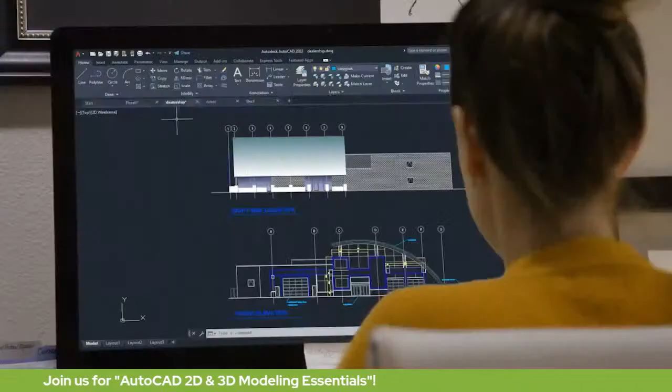Welcome to AutoCAD 2022. AutoCAD is a CAD leader with best-in-class 2D drafting and 3D design, trusted by millions of designers and drafters. AutoCAD 2022 is leading the next generation of design by tapping into intelligent automation technology to empower designers like never before.

By automating time-consuming tasks, enabling users to focus on the most valuable design work. By including features like Count that eliminate manual counting and errors, or Trace, a feature that streamlines collaboration and reviews without altering the existing drawing.

And to accomplish industry tasks faster and with more precision, AutoCAD's industry-specific toolsets could help users realize impressive productivity gains averaging 63%.

And because Autodesk products are made to work together, projects designed in AutoCAD work seamlessly across tools and teams. Leverage the power of AutoCAD, no matter the place or platform: Mac, PC, laptop, mobile, and cloud.

In the office or in your home, the included web and mobile apps in AutoCAD 2022 let you work wherever, whenever, or on whatever device you want, using the cloud storage platform that you prefer.

From the job site to your backyard, keep your projects on track while away from the office with the AutoCAD mobile app. Design, edit, and access your DWGs right on your mobile device.

And for essential CAD drafting tools from any computer, there's the AutoCAD web app. Simply log in and get to work in a web browser, connecting to your DWG files in Autodesk Drive, Autodesk Docs, and third-party cloud storage providers, drafting with the same precision and fidelity you've come to expect.

The 2022 AutoCAD connected experience across desktop, web, and mobile also features Share, which delivers peace of mind by providing control over who can access and edit your files. AutoCAD: the tools you desire, the innovation you deserve.

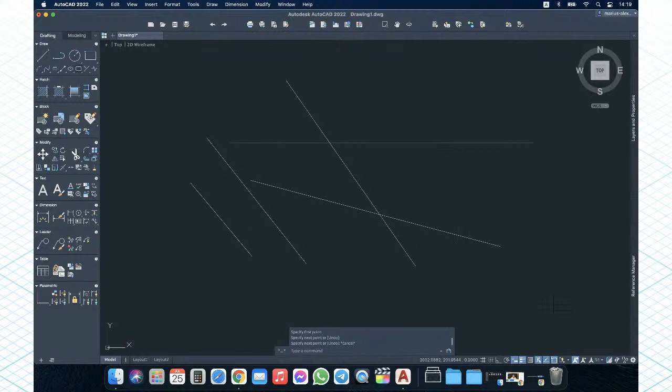Now I've shown you how to draw a line. It's very simple and fun. Another way to draw a precise line is, for example, if I want to draw a line at a 45 degree angle with a length of 100 units.

But before doing that, I want to say that before every single drawing, the units are very important. To manage the units, you need to write 'units' and press enter, since it's another command. A window full of options will appear. For those without a macOS, don't be scared, because I usually just use written commands, so you don't need the taskbar—just write the commands and everything will be fine. This window will be similar to the Windows version, with a window full of options.

Here you have the type—I will personally select decimal. You can also select scientific, engineering, or architectural, depending on your domain of activity. For precision, I can leave it at 4 decimals, but I usually work with 2. It's also fine to use 1 or more if you work in kilometers, for example, but I'll leave it at 2 decimals for today. For light intensity units, I'm from Europe, and I believe most of the world uses the metric system, so I'll set it to international instead of inches.

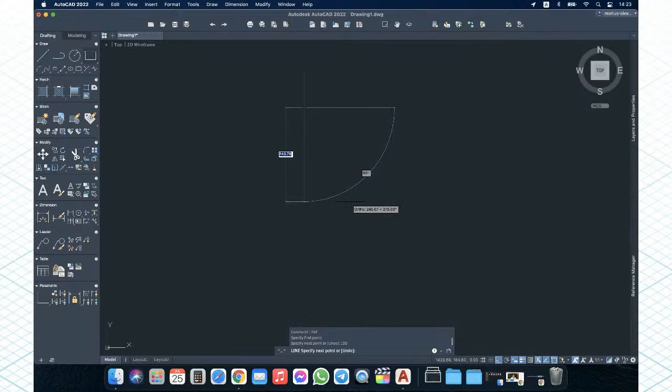Let's go on, for example I want to draw a rectangle. Instead of doing 4 lines with the line command, I want straight lines, as I said before, so I'll use the ortho command, or I can write ortho with the keyboard. Let's say a line of 100, enter, and the command is still active. 100 again, 100 again, and I came back to the starting point.

But as you see here, I have a little endpoint here. So in order to deal with that, I will click on it and then press escape, or I can right click. But you see that I had there a little green square.

For that, I can go to the settings, another important command with a bunch of options. Depending on what I need to do, I have more options here. In my case I needed endpoint. If I uncheck it, I cannot see it anymore. Usually you don't need to work with all of them, but if you're a complex user, you will basically need all of them. So you have endpoint, midpoint, center, geometric center, node, quadrant, intersection. In the following drawings I will show you how to apply around 6 or 8 of them. So I will press OK.

Now let's say here I have 4 lines, you see there are 4 objects. But look, for example, I selected one object and I'll go to the panel, or I can press Control 1, this combination of keys. It says here, line, properties. So line is one object. If I select 2, there will be 2 lines.

But if I want to have just one single object, I need a polyline. Let's combine them, use 2 lines for example, and apply the join command to have one single object. This way we gain some time if you need to copy this part. So let's say I want to construct one single object through all 4 lines. I select all 4 and press the join command. Now instead of 4 lines, I have one single line, which is also called a polyline.

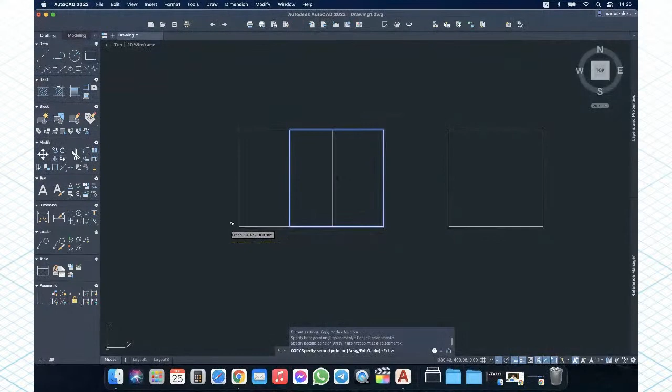Now I want to copy it, for example. Let's use the copy command. It's already selected, copy, select the center point or a reference point, and you can copy it. It doesn't matter where it is or how long it is.

In order to move them, for example, I want to move them, select all of them, write the move command, and move them where you need.

Good, for the next step, here I have the draw tab. Now I have the hatch. For example, I need to use the hatch of earth. I can click on it or write hatch. As I said before, every command you can also write instead of just clicking on it. You will gain much time this way.

For example, I want to choose another one. So I open the library and I will write here earth.

I will click on it and voila, I have now the earth here. It's very simple, it is very usual.

Okay, so now another interesting fact, and then I'll move on to the drawings. Let's say I want to move this one in a lot of places. So, I selected, I copied, I pick a reference point, let's deactivate the ortho command, and I place it here and here.

Okay, let's say I want to have a little modify. So I pick up the hatch, move command, and I will move it. I'm not happy because I want to have the same feature also on the other side. In order to do that, I will go to undo, or press Control Z key.

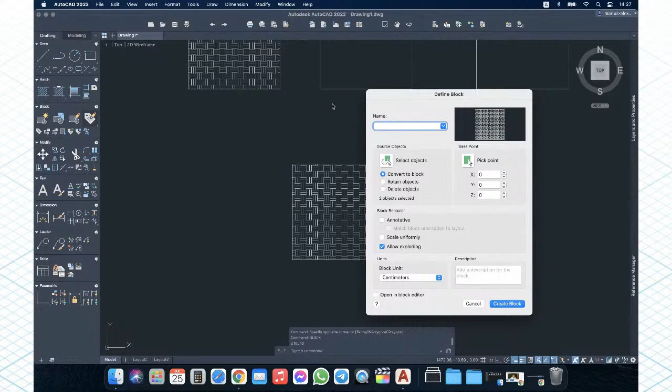I will select it and make an intelligent block. So I selected, I press block, press enter, and now another window will appear. For example, let's write here the block name, Earth. Then select objects. I select not just the hatch, but also this polyline, and press enter. Now I will create the block. And the beauty of this part is that you gain a tremendous amount of time.

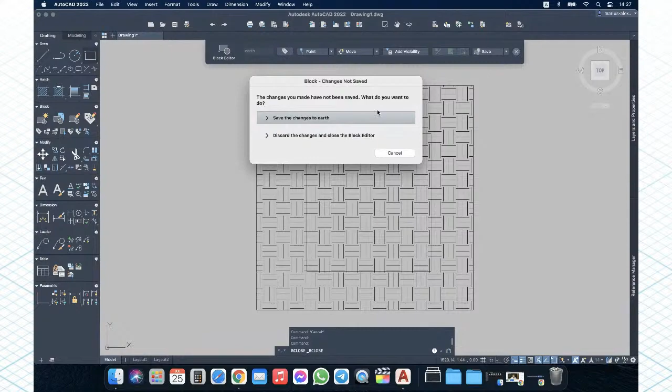For example, I select this part, I copy it, and now I put it wherever I want. And the beauty, as I said, let's say I want to have a little modify. So I press on it, and now I can go here and make a modify, for example, to add another rectangle. So you can press here or write rectangle, and I will create a rectangle over it. Now I close it, save the changes, yes, and this is the beauty that I was talking about.

So here I have the same drawing, but updated in every single one. So it is much more efficient, and I don't lose a lot of time this way. And here I have also other options.

For example, dimension. I want to measure something. I can go here to dimension, and I can select to dimension something. And you see, I have 100, as I said before.

But enough with this presentation, enough with this talking. Let's start to do something productive, to work and to draw something. I am prepared for you today with 3 drawings in 2D.

So here I have. Let's start with the first one because it is very simple and very common. So let's go back. In order to do this, I will open a new tab here, a new template. I will create the ortho mode already, and I will change into grid display to have a better view.

Good, let's have a look again at our drawing. So we will start now with these 2 circles because you know now how to construct them. We have 2 circles, one with a diameter of 80 and another one with a diameter of 40 units. So let's write circle, and now we'll write 0,0 because it is a very important remark to start from the origin, from the XY axis. Enter, and we will write D for diameter, 80 units.

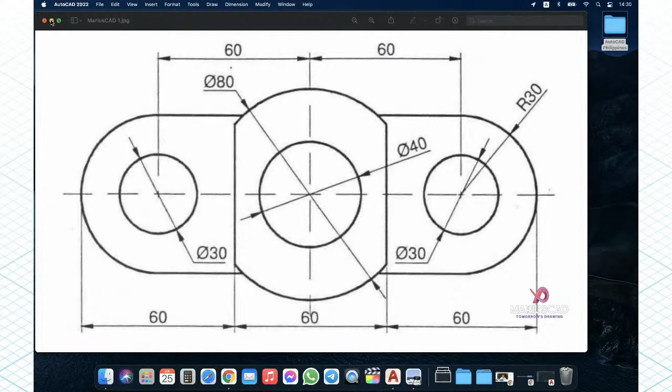So write the line command. Starting from the origin, you can click here because it automatically detects the center point, or write again 0,0. My advice for you, especially for all beginners, is to help yourself as much as you can from the origin, because it will help and gain a lot of time and energy. So trust me. We have the line now, and we will write 60 units, press enter, and then escape to finish the command, because the command is still active.

Now, from this end point, our duty is to work and draw these two circles.

So a circle with a diameter of 30 units and a circle with a radius of 30 units. Let's go back. Let's write circle, starting from this point, not from the origin this time, and write just 30, because this one will be with a radius of 30. Now, when it comes to diameter, write circle again, starting from this point, and press D for diameter, 30 units.

Okay, now it is enough with this part. Let's add these two lines, in order to construct this line from this point, because it is a specific point, exactly a quadrant of the exterior circle, and we will prolong it until it reaches this distance.

So let's delete this part, delete this line, and write line again. Starting from this quadrant, you see this green quadrant here, and make it longer. It doesn't matter how long it is.

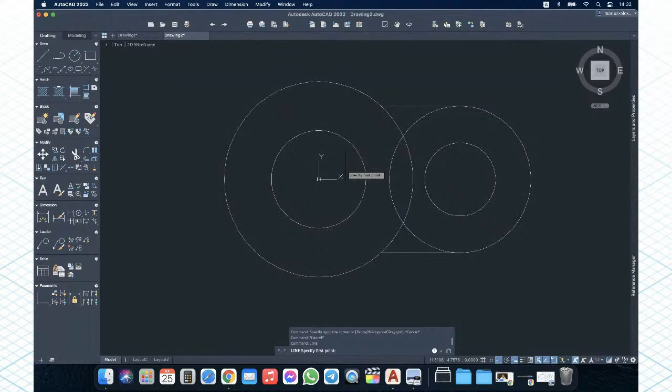So we will write a line. We will start from the origin, so 0,0, and we will make a line. It doesn't matter how long it is, but we will extend it. For this, use the extend command and select this surface, or this one.

But in our case, you can also copy this one, copy command, and place it exactly here. And as I showed you before, to have one single line, select this one, select the other one, and press the join command to have one single line.

As you see, we have 3 points here, not 6 or 5. Good. Now the line is already selected.

Apply the offset command. The offset command is a command for parallel lines. Offset it, now write 30 units, because this is the distance, and select each side you want to have. I want to have it on the right side.

Okay, escape. And now it is time to trim. But in order to do that, let's delete all the extra parts. So delete this line, we don't need it anymore. And here we need to have this line, you see it, until here.

So keep it in mind, select the entire drawing, Control A, trim, because it is way faster. Also this little part, this tiny part. Okay, the same thing in the other direction.

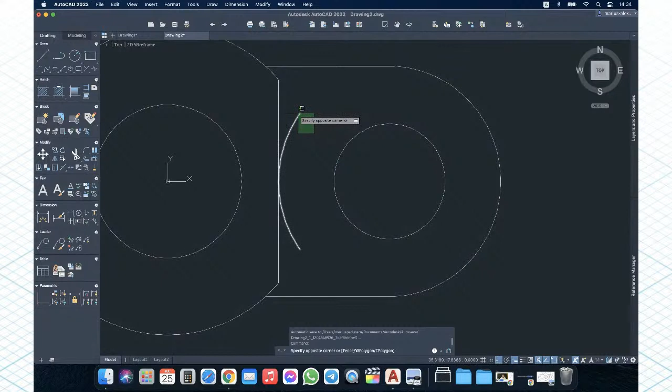Good, let's delete these arcs. Boom, okay, escape, select this arc and delete it.

Now our drawing is half done, but we are very clever people, so let's do another command, the mirror command, because it is basically a mirror. So copy this part that you want to mirror, enter, and read every time what is written right here: specify first point of mirroring line.

So we need to draw now the mirroring line. In order to do that, let's select, for example, this point, it doesn't matter which point. Be sure you have the ortho command active, because I will show you right now to have an idea. So if I don't have this command active, you see it is not a perfect mirror.

So in order to do that, I will press at the point, it doesn't matter where, and I will be asked 'erase source object', and I will press no, because otherwise if I press yes, this part will be automatically deleted and I still need it.

Select the entire drawing now again, press the trim command because it's faster to select the entire one, and delete this part. And voila, our drawing is now complete. You can see it is the same drawing.

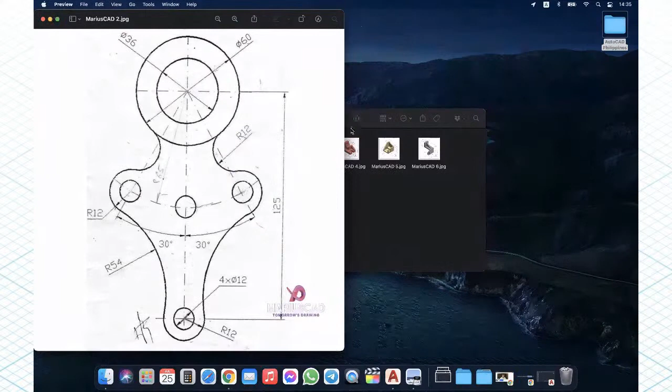Good, I hope this example was clear. Let's begin and go furthermore. We have another one prepared here for the 2D part, so I will make it full screen. Okay, so look at it.

Now we will start with this drawing with these two circles again. So in every part, just focus on the biggest side because it is the most important and it is much faster to do it.

So select this part, go to this circle. We have here a circle with a diameter of 36 units and a circle with a diameter of 60 units. Let's not change the template, we have enough space here.

So let's move the origin instead, because this could be very helpful. Go to the origin, I will zoom in a little and select move origin only. We will move it to the other side of the 3D parts. Please be patient. So, a circle with a diameter of 36 and 60 units, keep it in mind.

But in our case, there are centimeters. So circle 0,0 to start from the origin, then diameter 36. Now circle again, 0,0 to start from the origin again, then diameter 60. Let's have a look again - 60, 36, okay, everything is perfect.

Now let's draw another line. Here we have another line of 125 units in order to reach this point and these two circles. So a circle with a diameter of 12 and a radius of 12. Let's do that.

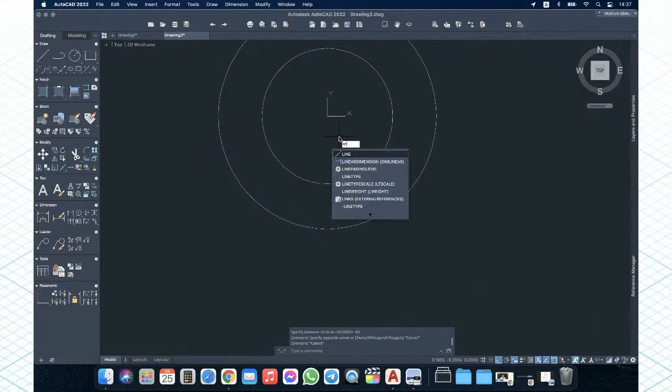Let's zoom in. I'll write line 0,0 to start from the origin, as I said, 125 units. Press escape. From this point, the magic will happen again - circle, starting from this point, write 12.

This one will be the big one, the circle with a radius of 12. Circle again from the same point, diameter 12 again. So now we have these two circles.

Now let's construct the biggest circle in this drawing. You see here that we have a radius of 54 units in order to reach these 3 little circles. We will start from the same center as the other two circles. So keep it in mind, a radius of 54, a pretty big circle actually for our drawing.

So circle, we can start from the origin, 0,0, and now we will write 54 units because we need the radius, not the diameter. Here it will be our first one, but you have to pay attention, I suppose. Here we have 4 circles with a diameter of 12, here, here, and here, and on this side we also have the circle of 12.

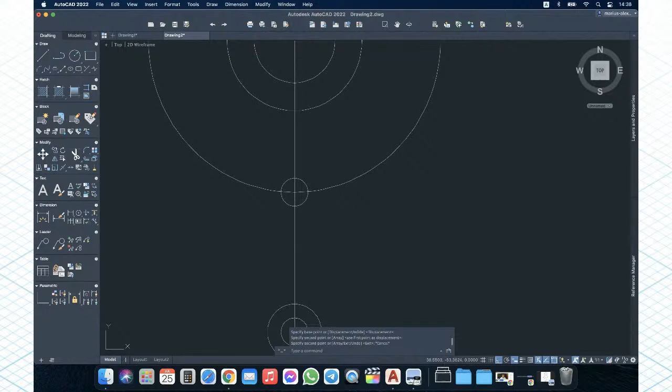So let's copy it, let's be a little more intelligent and copy it. Select this one, copy it. Go here from this point, because this will be the base point. And in order to know where this circle is, let's be a little bit funnier.

So let's go here, and now you see that we have an angle of 30 degrees. In order to reach this angle, we must construct another line, a line with a radius of 30, in order to reach this circle too.

So we will go here to this point, we will write a line again, and let's deactivate the ortho command. We will go here, and as you see, I am free to do a line, but pay attention to me and apply the Alt key. So press Shift and Alt key, and now I have more options.

So now I will press the length. The length, let's say it will be 100, it doesn't matter too much. 100, then press the Tab key, and you see now the 100 length is blocked, so it doesn't matter how long I want it to be because it is blocked on 100. Now the only thing that depends is the angle.

And let's be clever here. So this is 270 degrees. I need to add an additional 30 degrees angle, and 270 degrees plus 30 degrees, that means 300. So we will write 300 degrees and press enter.

Press escape, and here at this intersection point, we need to copy the circles. So copy these two circles, copy it. This center will be the reference point, and we will place it like this at this intersection. Now select this line, select this circle, and delete them because we don't need them anymore.

Let's have a look again at our drawing. So here we need to have a radius of 12 units, and here a radius of 54 units.

So fillet, because this is the command for the radius. Let's read: select first object, or polyline, radius, trim, multiple. In our case, it will be radius. We can write radius, or we can write just R. I will show you right away, but first of all I will write radius. Press enter, select the objects now, or specify fillet radius.

I will write here because it is needed, I will write 12 units. Let's go back, 12 units, enter. Okay, I have a little problem here, but it doesn't matter. Fillet, radius, 12, enter. And now select first object, this one it will be, select the second one, and this one it will be, and automatically I have the perfect radius that I need.

In the other side, I have here a radius of 54 units. You see it, let's apply it. Now you know properly how to do it. Fillet, radius, 54 units, select this circle and the next one. Good, everything now it's perfect. Okay, let's have a look again.

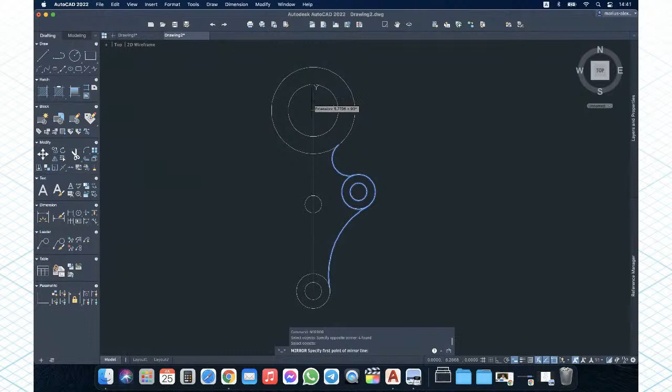We don't need it basically anymore, but let's do it on the other side, and you guessed it, we will use the mirror command. Mirror, select all the parts that you want to mirror. Enter mirroring line, we can start from the origin, from this endpoint, or from this center, it doesn't matter. Erase source objects, no. Okay, now delete this line, and select the entire drawing, use the trim command, and delete extra parts that you don't need.

Okay, let's have a final look, and here it is. Our drawing is again complete.

I hope all the explanations are clear, but for an extra step, I want to show you something that may help. So here I have an arch, here I have a circle or an arch again, here I have another circle, so I have more objects. Select the entire thing and write the join command, and now you see I have one single boundary here. It's very important, but it is very easy. Good, this drawing is done.

Let's move to the other one, the third and last 2D drawing for today. It looks nice, but we can handle it very easily. This one is a little bit harder, but I will show you some other commands, and I will show you how easy it is after that.

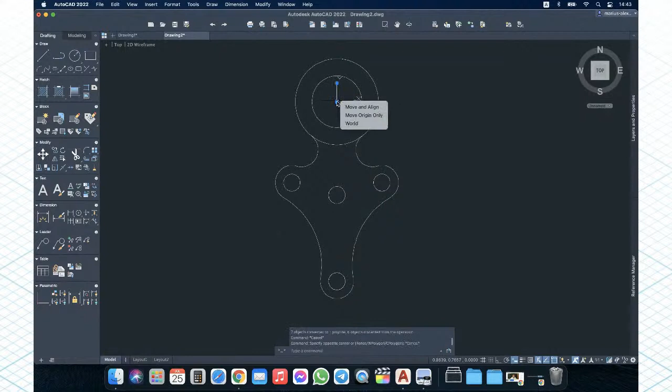So let's move the origin again now. Move origin only. Activate the ortho command if you want, it doesn't matter in our case. Okay, and now we are ready to go.

So this object, we will start here through a circle right here, with a radius of 20, starting exactly from the origin. It is not something hard, it is already fine. So circle with a radius of 20, and then we will add a line, here we have 80, so we will divide it by 2, it will be 40 units. So circle 0,0 to start from the origin, and we will write 20 units.

Now construct a line again from the origin, 0,0 again, and we will write here 40 units. Press enter, and now you can right click on it and press enter, or you can press escape. Here we need to construct another little circle, a circle with a diameter of 10 units, and the other one, if you're making the calculation, it will be with a radius of 10 units. So we'll construct 2 circles. Circle, not 0,0 because it is not the origin this time.

We will write D for diameter. You see now, I measured the diameter and I'll write 10 units. On the other hand, I need to construct another one, so write circle in this part. And because this one it will be bigger, I will just write 10. So here it is. Now I will use, you got it, the mirror command again.

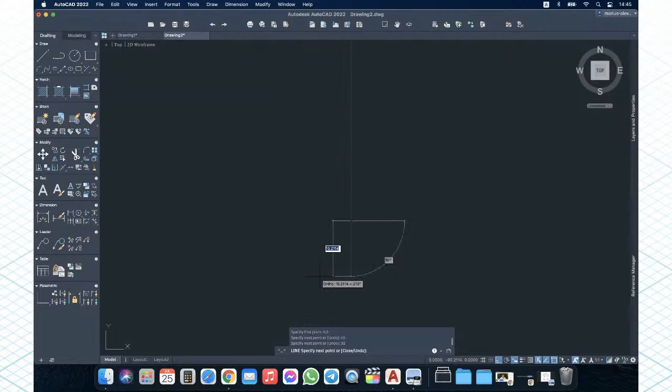But let's construct the other parts. So now we need to construct this one, a line of 45 units, 75 minus 30, and a line of 30 units. Let's go. Line 0,0, the first one I said 45, and the command is still active. And we will write 30 again, because it's basically the continuing of this line. And here we will go in the right side because we focus on this side, and we will go with a distance of 60 divided by 2, 30 units.

Line, 30 units, press enter. Okay, here we need to have two circles. So a circle with a radius of 10, and here it is 4 times a circle like this, so it will be also 10 and 10. But let's be clever and let's copy those two.

Again, in this way, again. So copy it here. It doesn't matter if you have the ortho command active or not, because you can handle it. You saw it, it is not a problem. Now go here, and you see that we need to have a little line. So after I made that 45 length line, I need to have here a line of 12 to 15 units, and then to reach this quadrant.

So select again, be sure. It's okay, it's kind of in this area. We got it. We'll write line, starting from this point, we need to find the endpoint. Okay, here it is. Ortho command active, perfect, write 15, press escape.

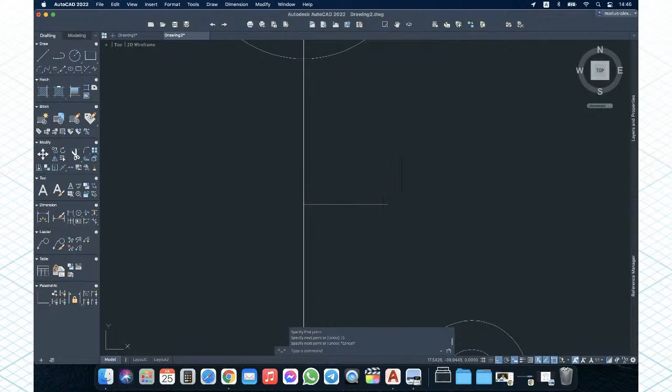Now, as I said before, we need to unify this point with this endpoint. So write again line, starting from this, and try to reach the quadrant. I will show you now a little secret, so pay very much attention. Press the shift key, now the right button of the mouse, and I can select, and I'll go here with quadrant. Here it is, escape. Okay, everything is perfect now.

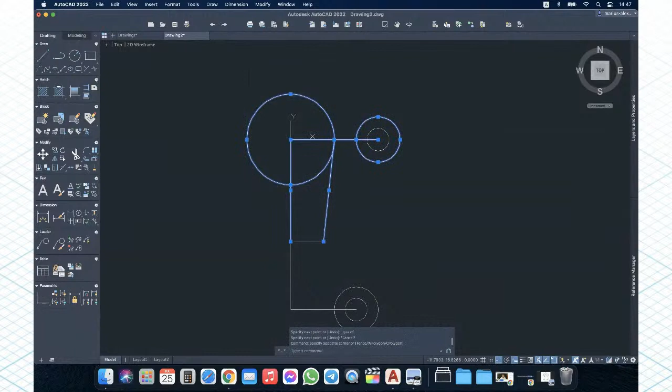So I have this part. Let's trim a little bit our drawing to be much easier to see. So select this part, trim. Okay, here it is, you can delete this line, but pay very much attention. Here it is not everything all right. For this one, select this part, trim it. Until here it will be unified.

The same thing we must do in the other direction, but instead, let's draw this little arch here. This little arch will be a radius of 20 on the exterior circles. So right here, fillet, radius 20 units. I cannot, it is a problem, so I will show you, and again, fillet, radius 20 units.

Maybe it's because I have here a little line, but let's mirror it and then we will do it. I believe it's too big, but it doesn't matter. Let's go and mirror it and do it on the other side. So let's copy these two, actually these 4 circles. Select those, mirroring line, this point, erase source object, no.

Oh, I must also mirror this part. So mirror, same mirroring line, no, like this part, trim, and trim also this little side.

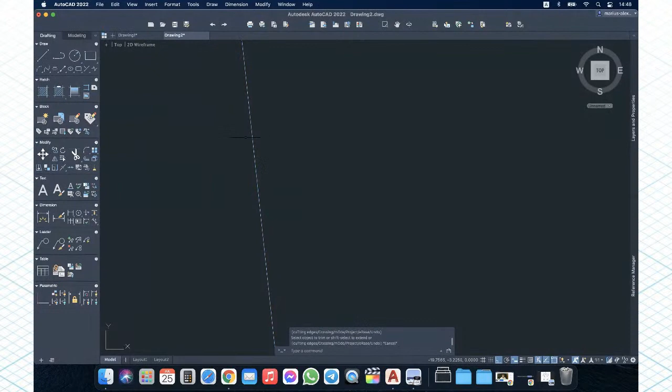Wonderful. Okay, here at the bottom we need a radius of 40 units. Select, fillet, radius 40 units. Good, you can delete this line. Let me show again, so here, okay, this line also must be deleted.

And let's construct, for example, here, this part. So we need to have here another circle with a radius of 30 units from the same center. Delete this one. Circle 0,0, radius of 30, write just 30 and press enter.

Now, in order to have this big arch here, because it is a very important command, for the Windows user, you have something here in this place on the circle, but I have here draw circle and more options. For the Windows user, you'll see it in that part on the left side. And I need here tangent, tangent, tangent.

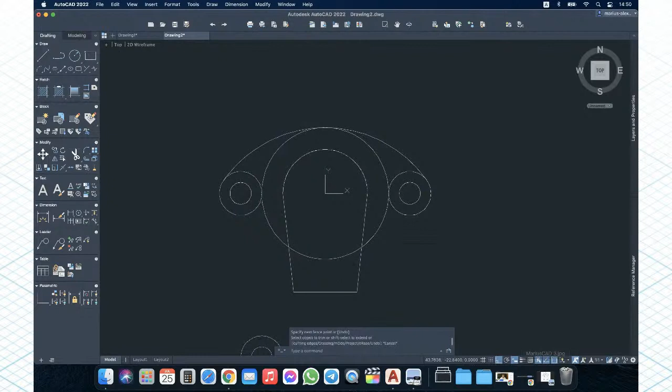So a circle here, a tangent, the second tangent, and the third one. And voila, you see, I have here a big circle, and now the only mission that I have is to trim. So select the entire drawing, trim. Let's trim this part, and the magic will happen. Good, delete the circle, okay, and now on this one too.

And now let's focus on the final part to gain these radiuses. So radius of 20. Oh I got it. I forgot to make a line here, but look, it is very important. So a line on a parallel of 10 units, for this offset command, 10 units, pick up this line and copy it. The command is still active. Select the other one and pick it.

Good, now it is the magic time, it is the time to make magic. So here we have a radius of 20 and here a radius of 15. Fillet, radius 20 units. Like this line and the circle. You can preview it.

The same thing we'll do on the other side. Fillet, radius 20 units. Side here we have another. Fillet, radius 15, write 15. Same thing, fillet, radius 15.

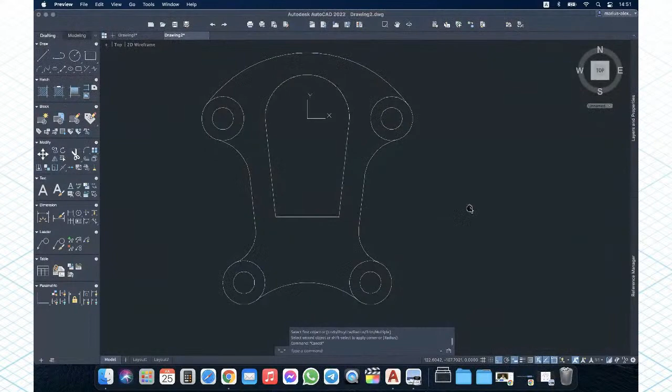Good, and I believe our drawing now is finally complete. But let's delete this part. Select the entire one, trim. Let's focus on it. Okay, and the drawing is perfect.

We have here perfectly 3 drawings made. I hope they are good for you. I hope I was very understandable, and I hope now you'll know how to draw perfectly, especially on the 2D side, because 2D is much more simple compared to 3D. But don't be discouraged, because the 3D will be also as easy as possible with my guidance.

Experience the power to design, build, create, the power to turn ideas into reality, and the power to do it all better and faster than ever before. Welcome to the future of design. Welcome to AutoCAD 2022. AutoCAD is a CAD leader with best-in-class 2D drafting and 3D design, trusted by millions of designers and drafters. AutoCAD 2022 is leading the next generation of design by tapping into intelligent automation technology to empower designers like never before, by automating time-consuming tasks, enabling users to focus on the most valuable design work, by including features like Count that eliminate manual counting and errors, or with Trace, a feature that streamlines collaboration and reviews without altering the existing drawing. And to accomplish industry tasks faster and with more precision, AutoCAD's industry-specific toolsets could help users realize impressive productivity gains.

My name is Mr. McCluskey, and your minds now belong to me. Huntley Boarding School for Boys just hired its newest teacher. Books? You choose to read those books? I think not. It's time to strike out on your own minds.

Audiences and critics are raving about Mr. McCluskey's Method, the new film from acclaimed director Autodesk. Close those books, close them, and choose your own path. Except for you, Thorndike, you keep reading.

How can you design your future if you only read ancient stories of yesteryear? You need to live in the now, to create and visually communicate. How else will people see your glorious vision if not visually? Explore the rich colors of life in beautiful 3D. Jensen Coswell of the Chicago Tribune hails Mr. McCluskey's Method as a classic, one of the best motion pictures I've ever seen or ever will see.

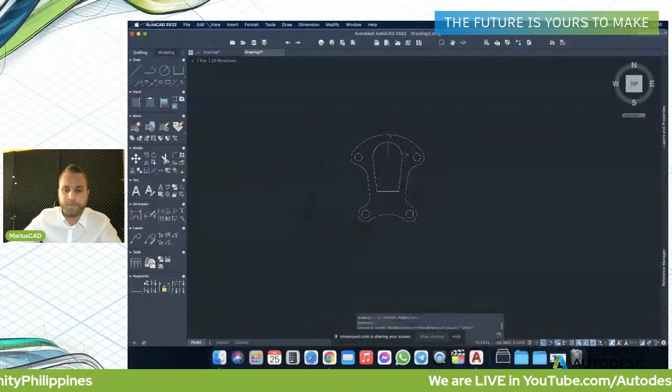Okay, let's begin sir. Previously I showed you how to handle the 2D part, and now I am glad to show you the 3D part. So pay attention. Here I have tabs and ribbon areas that are the same and will remain the same, like the taskbar located here with edit, view, insert, tools, draw, and so on.

But the only difference now is that instead of drafting, I will press modeling. So here it will appear all the commands that are for 3D. Let's have a short introduction. Here I have a bunch of ribbon areas: for solid, for surfaces, for meshes, for UCS, for draw, modify, and visualize.

It is very important, in order to draw a 3D object, to show you the principles. So we can click here on a new tab or new template. We will activate the ortho command and disable these two parts. Now I want to present you this.

So in the 2D plan, we have here the XY axis. It is obvious we are now in the 2D plan. Let me show you, I will create a short rectangle.

Okay, easy, nothing fancy. But now I have here the view cube and a small home button, or home icon, doesn't matter how you want to say it. If I click on it, this rectangle will appear on a 3D plan, so it is just a surface. But here, from the XY, it will also appear the Z axis, which indicates that we are in a 3D plan, in the 3D workspace.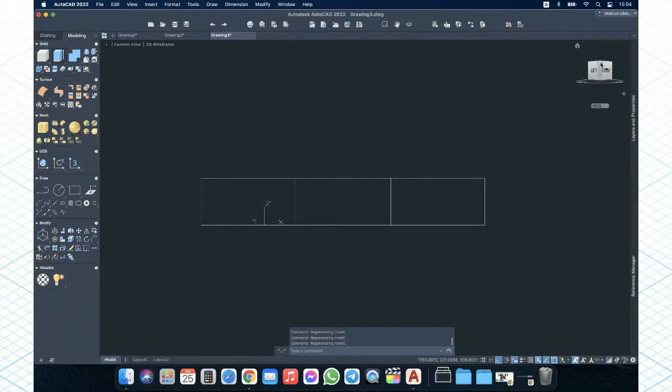Good, now let's see the box from the top view. For example, I want to see the box from this part, so I will go to this little corner and see it from the other angle. Or I want to see it from this corner, or the other corner as well. But every time I press the home button, our drawing will be much more visible and clear.

Speaking about this, I have more options here, basically the same thing: to see from the top, bottom, left, right, and so on. But the home button is perfectly similar with southwest isometric, so try to imagine this is southwest. If I want to see from the southeast, from the other part, it will automatically switch, and every position becomes a custom view. Press the home button again, and now you've got it. Here I have a little compass that I can rotate the drawing with.

Good, home button again, now you get the idea. And speaking about it, let's add a little material to be even more clear.

We will go through the command mat browser open to add the material. I'll show you right away, because here we have custom visual styles - 2D wireframe, hidden, realistic, shaded with edges, sketchy, wireframe, and X-ray. I'll show you just a few of them to make you familiar, so I'll place it first to realistic.

So it is more realistic, as you see, but now let's add the material. Let's write, for example, here, and I have a bunch of options. Let's make it bigger to see it. For example, let's pick this one.

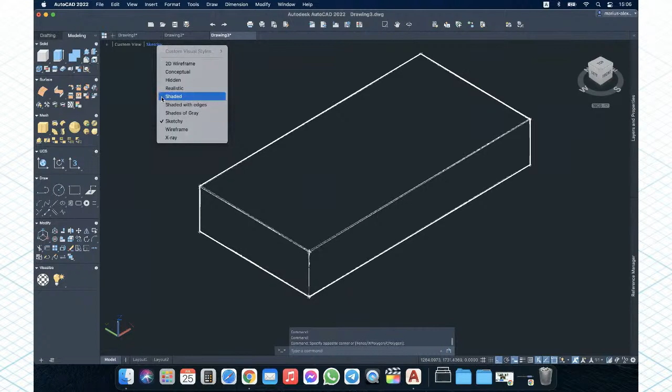It will be the automatic, or the most accurate representation compared to reality. So now it is on realistic, which is the name, so it is obvious that will be the most realistic one. Into 2D wireframe, it is the most workable way to do it. Shaded sketchy will be not just one line, but many lines - it's like drawing with a pencil. Now shaded, and now shaded with edges to see all the corners. So it is obvious we have a much better view, but let's remain like this.

Okay, let's delete it. I already showed you how to use the box command, and now I'll show you another way to do a box. Go to the rectangle - it's a 2D command, but you can use it also in the 3D plan. So we created a rectangle. Now let's add a height, and let's use the press pull command - select this area and drag it upside down. So it's basically two commands, but we combine both of them when using the box here.

Okay, I want to show you a really quick difference between extrude and the box. But for this, let's go in the 2D plan. Let's go to the top. Another important thing - we will draw in the 3D space just, pay attention, just when it is the XY axis. That's it, we cannot draw in the XZ axis, for example.

But let's draw now 4 lines, for example. Line of 200, let's say. Mouse wheel, escape, double click on the mouse wheel to be much more clear. Line again, starting from this point, the end point. 200, 200, and back from the starting point, or you can write 200 as well. Good, everything seems to be fine.

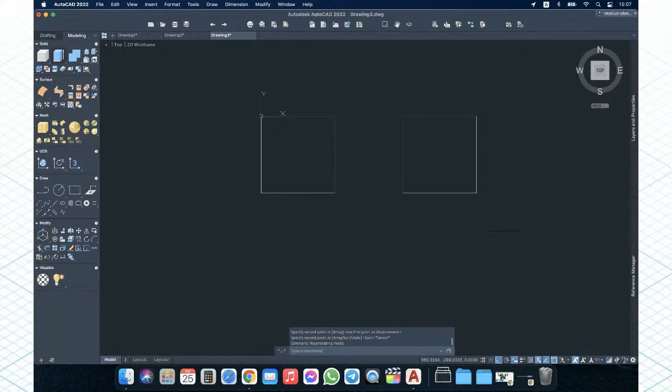Let's copy it, select all 4 lines and copy them. We have here 4 lines, but I want to show you another fact. Copy both again, paste it here, and select both and press the join command to have one single boundary, one single object. Now let's go with the 3D plan, and you get it. We'll press the home button to be easier.

And now I will use the extrude command in both cases. So extrude, select these lines, enter, and you see it is empty on the inside. Compared to this one - the command, it's not active. Extrude, enter, and I have now a solid. Let's have a better look. Shaded with edges - you see it's just the surface here, but here it is an entire block.

Even though, let's go to properties - select this one, go to properties or press Control 1, 3D solid. Compared to this one, select it - it will be just the surface from extrusion. Compared to the press pull, here it is a solid, and it was a polyline, so one single object. Here it will also be a solid, even though there are 4 lines. So this is the main difference I wanted to show you. This is why I'm currently working much more often with the press pull instead of extrusion, because I don't need surfaces, I need solid objects.

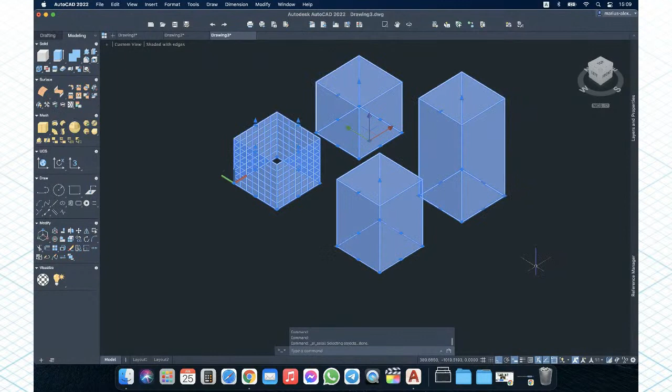Speaking about surfaces, I want to show very quickly the surface network. Select the entire drawing, delete, and let's focus now, go back in the 2D plan. Let's create another rectangle - or better, let's create 2 lines. 300, escape. If it is too long, copy it, and move it here. Good, ortho is active, it is perfectly a parallel and identical line.

Home button again. And now let's go here at this side. But look, I said before, we can draw just in the XY axis. Here you can also select parallel instead of perspective to be much more visible and clear. Another important step - for example, this is the home button, but I want this to be the home button. Right click, set current view as home. So now every time I press the home button, it will be in this position.

Let's undo this feature with Control Z, and change again to be more familiar with it. Here you see the YZ axis.

I cannot draw it here, so instead I'll put it at the left and change the UCS. Go to Tools, New UCS, and View. You can also do this from the keyboard by writing UCS and picking the point that works best. It doesn't matter if we're viewing from the top in a perfect 90 degree perpendicular view, or from 3D.

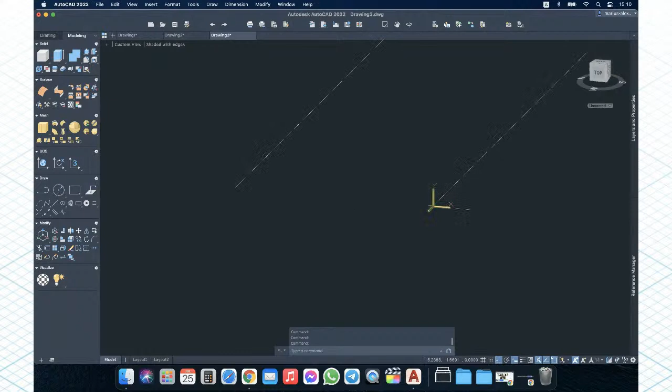For now, working in XY is perfect for us. Let's go to the Draw menu, Arc. Windows users have it here, but macOS users go here instead - this plan, top, Arc. Let's select, for example, 3 points, it doesn't matter - endpoint, and deactivate the ortho command. For example, this and this. Now we have a simple arc.

It is very simple. Copy this one, select the reference point, and place it here and here. To make it a little more interesting, select this part and drag it down, and the other one drag it higher.

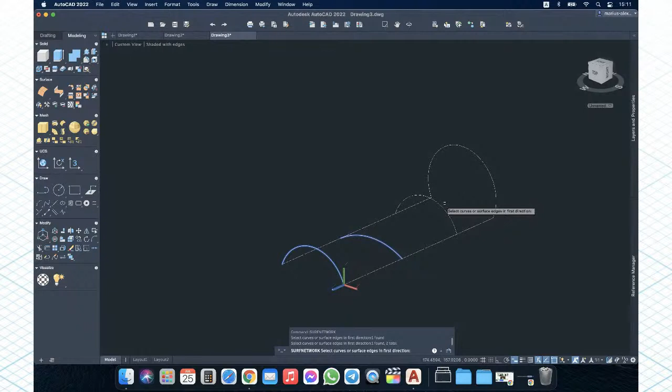Now let's use this command, surface network, or however it's written here. You can also type surface network. Enter, and it reads: select curves or surfaces edges in the first direction. For us, this will be the first direction. Press enter. Select curves or surfaces edges in the second direction. So now the second direction. Press enter, and here it is.

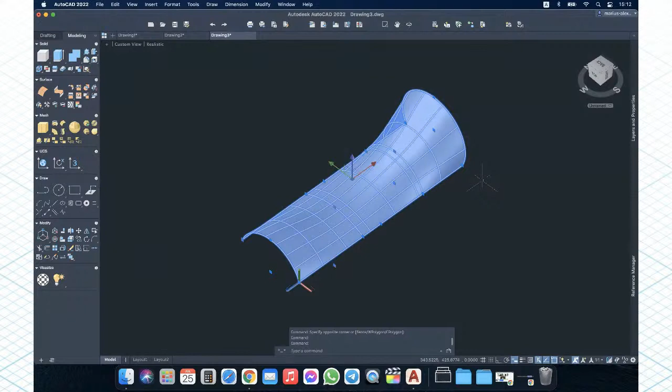Because it is shaded with edges, we have a much better view. Or we can go to realistic, but we need a material. Now you have an idea how to create a surface in AutoCAD. It is very simple and useful, especially when drawing something for a company or your work, when you want to be 100% sure about what you're doing, or to show professionalism. Let's delete it, and enough with the talking.

Let's start to draw. Let's create a new template to keep it clear. Activate this, and go to this folder. The first piece we have today will be this one. It's very simple, especially made for beginners to show them how it looks to draw in the 3D workspace. Let me show you.

As you saw before, we are in the 2D plan, XY. Now you see we are in the top view on Z. Everything seems fine. We'll start now through a rectangle or through a box, but I advise in this case, since we have this part, to start through a rectangle. So we'll start with a rectangle of 96 by 64 units. Keep that in mind, 96, 64.

Let's go into the 3D plan. So, rectangle, 0,0 - actually it doesn't matter too much. First dimension here will be 64, tab, 96. Double click on the mouse wheel, and okay, everything is perfect.

Inside this one, we need to construct this little part. To do that, we need to create a rectangle starting from here until we reach the center of this circle. We have here a circle with a diameter of 16, so that means 24 plus 8, exactly a radius - 24 plus 8, that's 32 units, and here in this part we have 20. Keep it in mind, 20 and 32.

And now the magic time. We will add a height or thickness here of, guess how much? 16. So press pull, you can click on it or you can write it. Press pull, it will automatically detect this surface. 16, enter. To be sure, let's change here into shaded with edges.

Okay, and here it is. It is perfect, it is wonderful for our drawing and for our purpose. Change it back, parallel, okay. Now the next step that we will do is to build this part.

So in this part, we need to construct another rectangle, but we will use it, and we have here all the dimensions that we need. So 30 plus 34, that means 64 units. And we will add a thickness here of 16.

But for this one, we are not anymore in the XY axis. This one we must change. So instead of this alternative with the tools UCS and View, we can go like this, UCS, to change the origin. Press enter, and now I'm able to put the origin wherever I need. In my case here, but to be sure it is exactly the endpoint, press shift, right click on the mouse, and go to the endpoint.

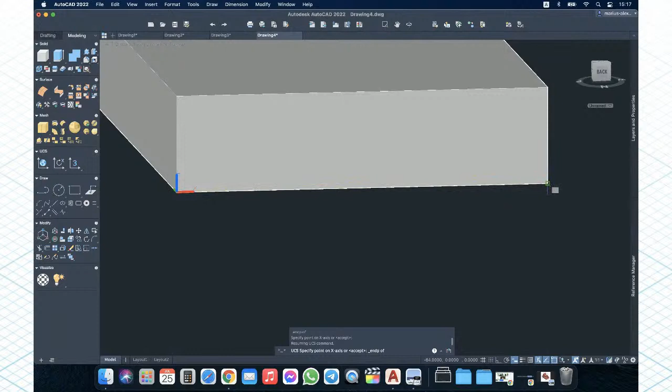I found it. Same thing, shift right click, endpoint. And now, by the way, you can apply the ortho command, and now we'll go up. Let's have a look. XY axis, perfect to draw our part. But I will show you now a little trick to make it easier, so let's change it back into 2D wireframe.

Okay, and now let's add this plane. So 30 plus 34, 64 units, and this will be exactly the length of 64 units, the small length of this rectangle. Rectangle, starting from the origin, this is the beauty because it will help us a lot with this origin. So 0,0, and look, we are not drawing in the other plane, we are drawing in this plane. 64. Tab, 30 plus 34, 64 again.

Good, now we need to cut from it, but first let's explode it. So select it and press X, or just write explode, enter. And like a miracle, now instead of one single boundary, we have 4 lines here.

Good, so now we need to construct a rectangle starting from this point, with the following dimensions, 20 and 30. Put it here to be much more obvious, rectangle. As I mentioned, 20, tab, 30, enter. I was correct, yes I was.

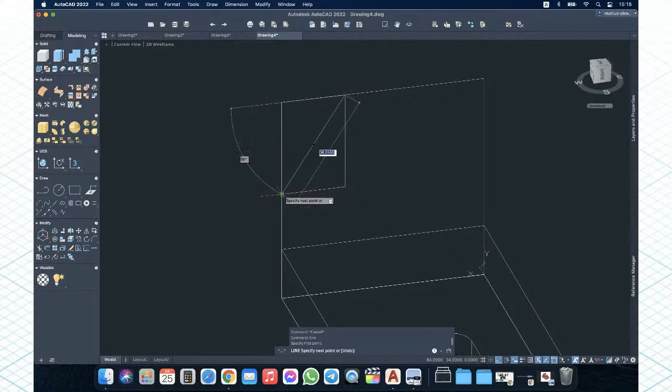And now let's draw a line, starting from this point until we reach the other one. Delete this one, enter, trim, or if I cannot trim, select the entire one and trim. Okay, select all these lines, this little one, join.

Boundary, as I said before, and let's add a thickness now, a thickness of 16. And to be even more clear, let's shade it with edges. You see it? Press pull it, 16. Okay, here I have it.

Good, for the next part, let's focus on this little part here. So it is exactly in the continuation of this piece, and we have here a length of 40 units and a height here of 28.

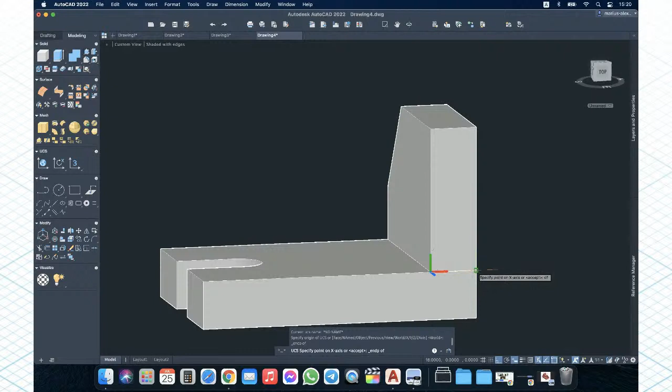We will draw this rectangle first, but pay attention, we need to modify the UCS or the origin again. Not a problem for us. Place it like this, yeah, kind of. UCS. Shift right click endpoint. This one it will be shift right click and point, and up.

Good, now we are prepared. Let's deactivate and go like this into 2D wireframe. Good, now let's add our rectangle. Rectangle 0,0 to start exactly, not here because the origin was moved, so it was tracked. Rectangle 0,0. Good, now that's what I was talking about. 40 tab 28, 40 units tab 28 units, and press enter.

Now our mission is to cut from it, but we need to construct a circle exactly in the middle, a circle with a diameter of 24 units. So circle, and search from the midpoint, yeah this green triangle, pay attention, midpoint. D from diameter, 24. Select the entire drawing.

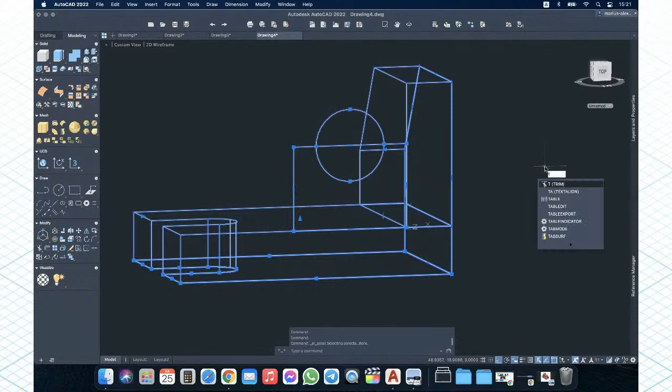Trim. Trim, no problem for us. Let's go like this. This part too. And let's have one single boundary, join.

Good, you guessed it, we will press pull it. We will press pull it with 64 minus 22, so that means 42 units. Press pull, 42. It is so easy as you see, very clever, and very easy to apply.

Let's go back. Here we need a triangle, we will construct from the beginning. We will construct a polyline.

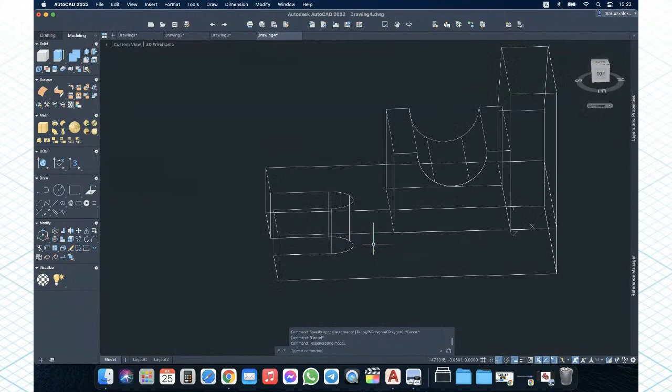So here the XY, it is perfect. Write polyline. Shift right click endpoint. Shift right click endpoint again, and for the final time. After that, escape or right click, enter. Good, we have one single piece for this time, and the thickness, I suppose, yes, 12.

Press pull, 12. Let's have a final view. Perfect, it is wonderful. And now to have one better view, or maybe I will show you one little and clever trick. So here you see we have many 3D solids.

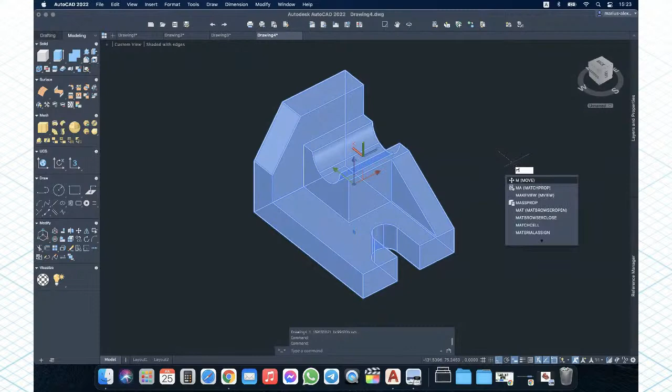We have 4 of them. In order to combine them, go here at the union command, you can write it also. Select, enter. And now when I click on it, I have one single. To have a beautiful view, select one, move command, and place it a little bit further.

And it will appear here all the lines that we were using. Delete them, and now it is one perfect and clean 3D solid. And let's add a little color for it.

What do you say about it? So this one, it is red. We will go here at Material Browser. Okay, and let's write here instead of wood, let's write red. And I have here a bunch of red. For example, this one, double click on it and let's color it.

And as you see, it is almost the same, but I need to have a perfect or a much better color view. So it is good. Let's move on. I hope you were understanding this drawing. So let's move on. The next drawing that I want to show you, let's close it.

It is this one. It is kind of similar, but it is more interesting to do. And the final one, it is the most interesting for this time because I want to show step by step how it is to work.

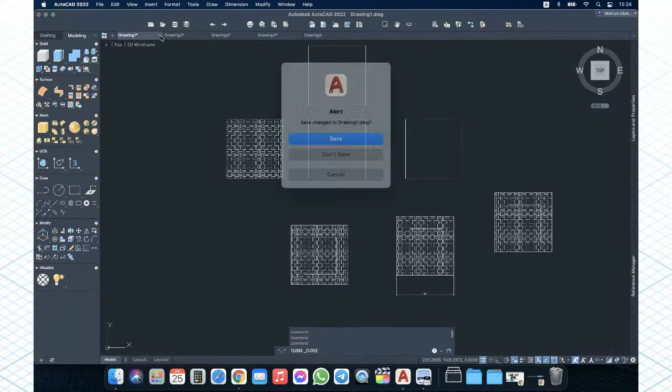Let's open a new template. You can close the other ones. No, don't save, don't save. Okay, let's focus here. Activate ortho command, disable the other command, and let's have now a short look. Or we can go here. Okay, now I want to show you.

So here we will start again through this rectangle, or in this case, we can apply directly a box command. So this box command contains these three dimensions, 98, 113, and 11. So I will try to keep it in mind.

Go with the 3D plan, box. It doesn't matter if you are starting or not from the origin. Let's create the first one, 113, tab. The other one, 98 and 11. 98, you saw that it is blocked. So 113, tab, 11.

See the other side? No, it is not good. Let's reconstruct it, it doesn't matter. In this way, we will learn much better. So 113, tab, 98, enter. The rectangle is prepared. And now we will go up with 11 units. Okay, and here it is. It's perfectly done. Let's move on.

Now we will construct here the other part, so the other section here. For this time, you got it, you must, or we must, change the UCS. In order to do that, let's go back. Let's change here this plan.

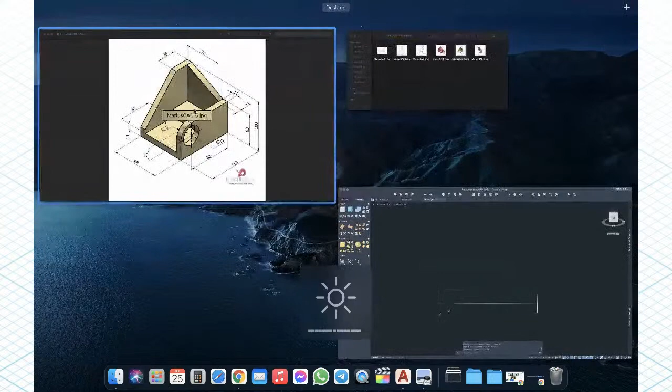Here we need now this part, so this section, we have here another rectangle. So we must build actually another rectangle starting from this bottom, so the exact bottom, 100 on 113. Good, rectangle starting from the origin 0,0. Every time, just be sure that it is the good plan, just to be sure. 113, tab, 100.

Now let's add a thickness, a thickness of here 11 units. We will see, because if you are doing these measurements, so 98 minus 11 minus 76, it will be 11 here. Press pull, 11. Good, let's have a look, just to be sure. Perfect, change it back to be easier to be seen.

Now, because we are also here in this plan, so if you can imagine, we end this here. So X, it will be in this way, and Y in this direction. We can construct not just this object, but also the other solid. In order to do that, let's go here and let's construct now another rectangle. A rectangle with, guess what? This a rectangle with the dimension 113, tab, 63 units.

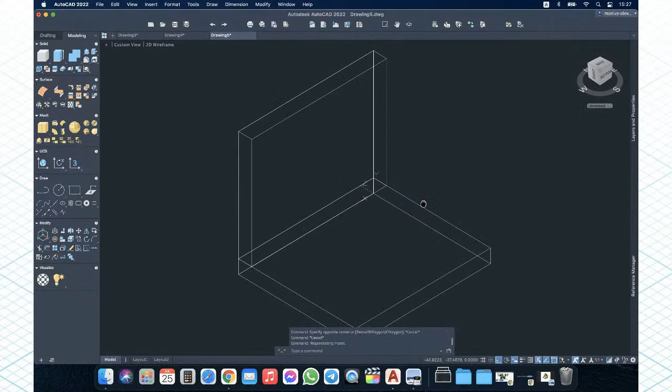So let's go here. Rectangle, endpoint, the same dimension here, 113, tab, 63 units. Enter. Inside of it, we need to construct, or we need another rectangle. A rectangle to know where it is exactly this circle. In order to do that, we will construct like this. We have here 25, and in the other direction, we have 88. So we will construct a rectangle starting from this point here.

Rectangle, starting from this point, tab 25 units, and press enter. Now from this point we need to construct a circle with a diameter of 38 units, and here we need a radius of 25. So keep it in mind: diameter of 38 and radius of 25.

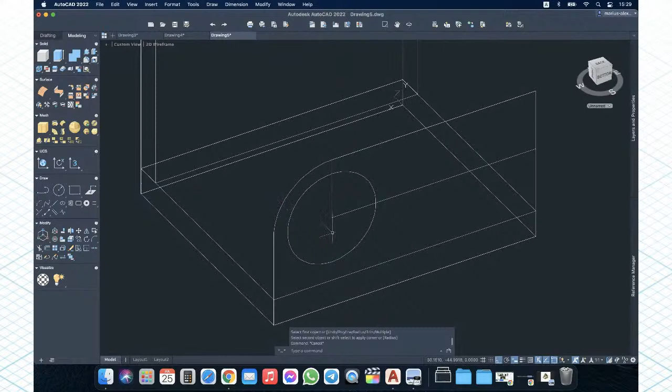So circle, like this point. No, it is not a good plan, as you saw. Pay very much attention because it will be tricky sometimes. Yes, this one will be. D from diameter 38. Lock the screen. Okay, everything is good. Now here, fillet, R from radius 25 units. And boom, here it is.

Now to be even more clear, I will show you something. Shade it with edges. Press pull, and I need to press pull it with 11 units, and here I need this hole to have 11. And you see, I don't have this hole. I will construct it, but will it construct like a 3D, or is it automatically a hole?

And the beauty of the press pull is that the command is still active. As you saw, I drew the thickness of this one and I made also the hole. If you cannot make the hole, let's go back, undo it.

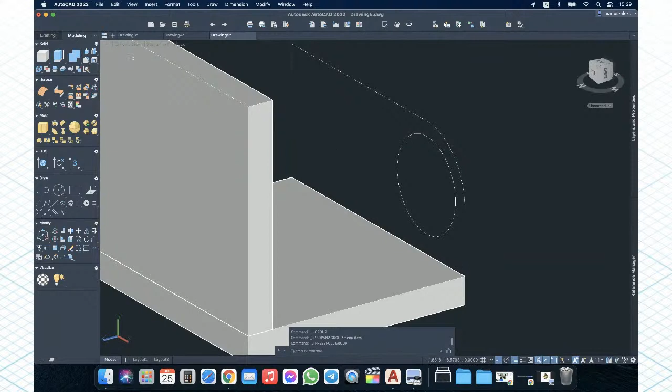11, okay, go out, and let's use the extrude command. If you cannot find this one, select both, and now press the shift key and disable the other one. Enter, and look, I created another solid.

But in order to delete it, I will apply another command, the subtract command. Select this wall, enter, enter, and here it is. Now I have the hole. It is very obvious, it is very simple, and sometimes it is very, very helpful.

Okay, let's move back. So here we need to construct the other part. It is simple in this case because we have from the bottom until here reach the distance, so we don't need the distance anymore. But we need to reconstruct this part, so to move the origin.

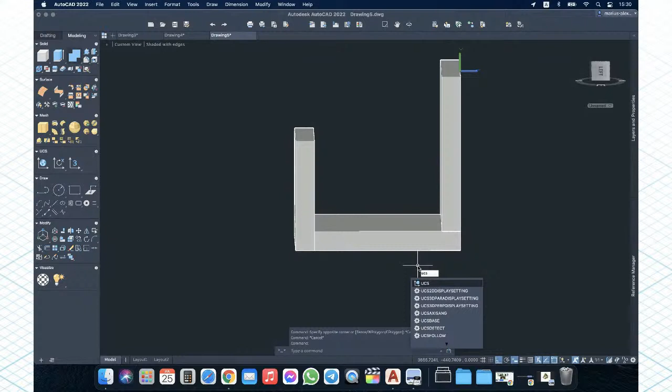So use UCS, place it here. Shift right click endpoint. If it is not very clear, escape it, go back to the wireframe and try again. Use UCS, shift right click and endpoint. If you can't do it, let's try from the other side. So here it will be the X and here the Y.

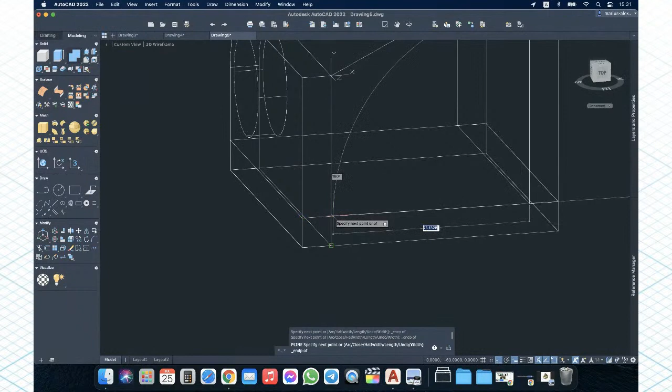Good, now let's make the other part. So right, polyline, starting from the origin 0,0, start to draw it. Shift right click endpoint. Let's go back, shift right click and endpoint. It is very helpful, and you could gain a lot of time in this way. Or maybe I have not the activation of this command, but it doesn't matter. Middle intersection, let's try. Okay, endpoint back from the starting position. Enter or escape. Good, now we have one single polyline.

Sometimes it is tricky because maybe you are not reaching the perfect point. For example, here I need to adjust, or I need to construct another structure. But in our case, let it be like this because the exact point doesn't matter now. I want just to show you the principle, how you can do it. So let's go here at the press pull and add a thickness of 11 units.

Like this, 11. Good. Exactly here in this part, in this side, we need to construct the interior part, this little tiny piece, or as you want to call it. So we have here from one wall to the other a 16, and this dimension we don't know exactly, but we will assume it will be also 38 units.

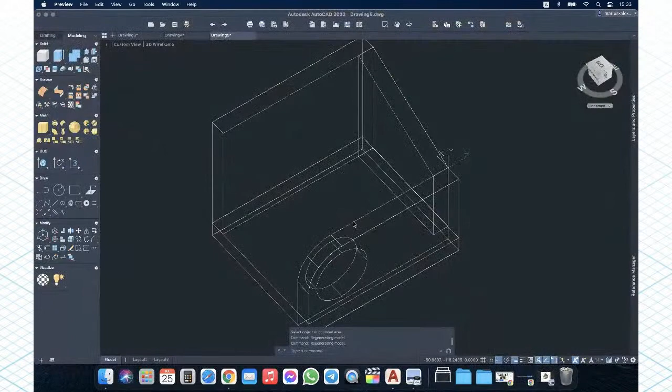Let's go like this, and I will show you one little clever trick. Let's change it here, and I will show you how the magic happens. Select this wall, and this one, right click, isolate, hide objects. Boom, now I have just this line, and it is much easier for me to draw something. 2D wireframe, now let's construct.

Okay, rectangle. See, I need here a new UCS. In order to do that, let's put them back. I'll show you how to do it: no, hide, isolate, end object isolation. And you saw, even though we are in the 2D wireframe. Okay, UCS, shift right click and point. This one will be the X axis. Again, shift right click and point. No. Oh, it automatically changed. It's fine for us. Good.

Rectangle, starting from the origin 0,0. Oh, the origin is not set, so we should zoom in a little bit more. Rectangle 0,0. Okay, I can show you like this anyway because it is not a problem.

So the first distance will be 38. Now let's make a little calculation: I need 11 plus 76, so that means 87 units. 87, enter.

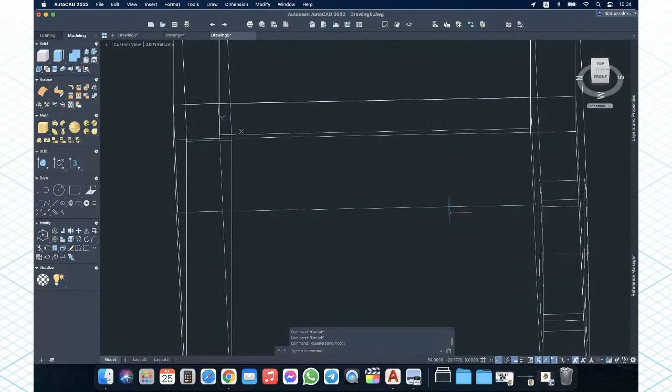Okay, and now because it is one single object, I will go to the presspull and use it. I will extend it with 16 units. Enter. Okay, let's have a look.

I forgot here to make this one, but it's not a problem. I will do it right away, or I can just skip it, or just undo it until it's done. I hope there is not an important way how to do it, but I will show you anyway. So select it, union, select it again, enter. Now we have one single object.

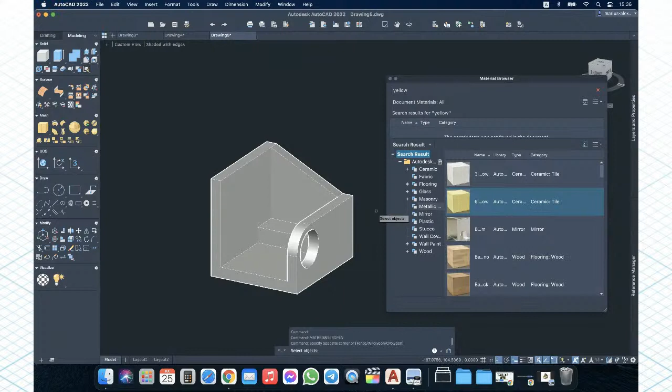I'll go fast because we don't have so much time left, so I want just to show you the principle. Let's color it, material browser open. Our drawing was yellow pretty much. Let's write here yellow. Okay, and here it is.

And especially on the color, you see, shaded with edges is one color, realistic it will be another one. So it depends very much on the visual style effect that you are choosing, the custom visual style.

Good, now let's open and let's make the final piece of art. This one it will be. If you have questions, don't hesitate to put them because I will answer to them after this final modeling.

Okay, let's go here. Let's open a new tab. Change here, work like this. I recommend to you: home button, and let's have a view.

Good. Here we will start with this box. So again, a box with the following dimensions: 84 on 50 on 10. So keep it in mind.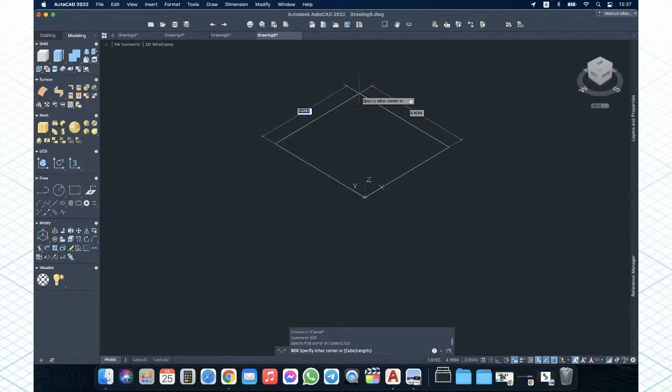Box 0,0 to start from the region. 50 tab, 84 tab. Go up. Enter. And let's go up now, if you can remember correctly, 10 units. Be sure everything is fine, everything is good.

Now let's focus on this part. It is basically another box, but first of all we should change the origin. So we will put the origin like this. Here one, it will be the X, and in this direction up, it will be the Y. For this one, let's change the origin, and then we will construct the next box.

So switch the drawing, as I said, if you cannot remember, press the Shift key and the mouse wheel, write UCS, Shift right click, and point, and place it exactly here to be correct. And up. Good, everything seems to be perfect now.

Now let's construct the box. And as you guessed it, we have a box with a dimension 50 on 56 and the thickness 16. So box, we will start from the origin. So write 0,0, first dimension 50, tab 56, enter.

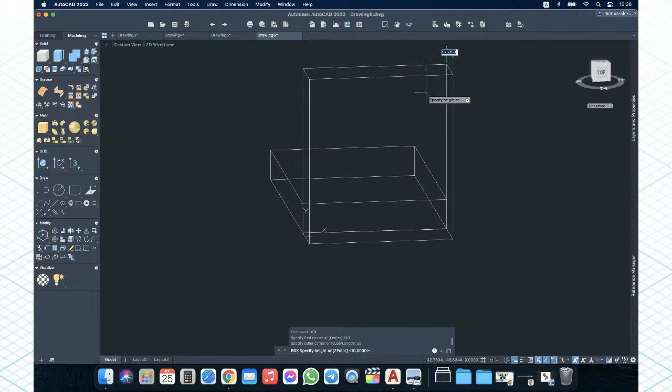And let's add the thickness now. Let's switch the drawing. And the thickness here, in our case, so here it was 10, and here it will be 16. Okay, and here it is.

Now let's focus on this side. It is better because we have here the XY axis. We can draw here in this plan also. So here let's construct the first rectangle with the following dimensions.

Here we have 70 plus the radius of the bigger circle, so that means 19. Let's have a little calculation: 70 plus 19, 89 units. And at this dimension it will be 74.

So box, shift right click, and point. Okay, like this: 89, tab, 74, enter. Now let's add a thickness.

Or maybe it's better to draw just a rectangle for this time because we can cut it. So rectangle, starting from this point, 89, tab, 74, 54 units.

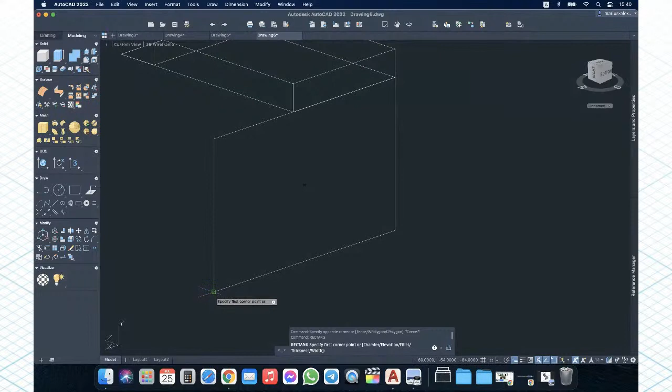Now it is the time to make another rectangle here, but to start from this point in order to know where this circle is. So we have here 19 and this side 19 also. So we will draw basically not a rectangle, a quadrant. Rectangle, 19, tab, 19, enter. From this point, we will draw our circle.

Basically two circles, a circle with a radius of 19 and a circle with a diameter of 19 units. So write circle, start from this point, 19. This one will be the exterior one. Circle, from diameter 19 units. Select this rectangle, delete it, and now let's trim everything here.

But before doing that, let's add another line here. Basically, it will be a line which is starting from here. So, line.

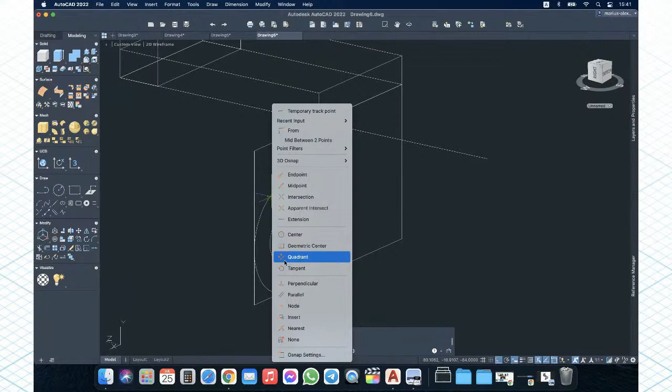It is not the end of the world if you are making some mistakes. First, let's explode this. So X or write explode, it's up to you, to have not one rectangle but 4 lines. And now let's start to trim. Okay, here it is. It is perfect.

Now let's add the thickness of 13 units. But before doing that, select all the lines here and press the join command to be sure you won't have any trouble. Press Presspull, 13. The command you see is still active. Go also here, and automatically I made the hole inside of it.

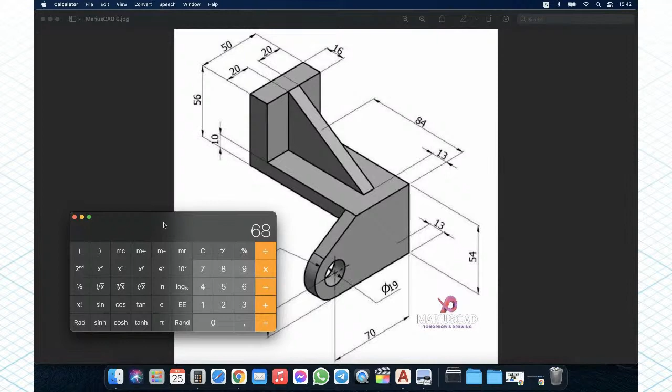And for the final part, let's construct here this little triangle. So this triangle has here a distance of 13 until we reach this point. So let's have a little calculation. Let's open the calculator, don't be afraid to use it. 84, so this length, minus 16, minus 13. 55. Go back.

And we will change the UCS because we need this side. So UCS, endpoint. Okay, let's put it like this. It is also the same thing, it's much quicker and easier.

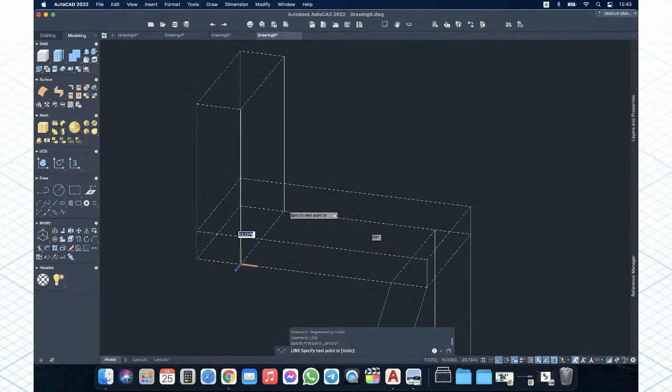Good, and let's start to draw it. But let's start from the top because it's much easier. So go to the line, or maybe it's better to start through a polyline. Maybe it's best to draw another line here to help a little bit. Endpoint, and we have here 50. Okay, we have a line. Let's put it up with this thickness, the thickness of 10.

Move, make sure you have AutoCAD active, and okay, let's place the UCS here. Move the UCS only, so not to change anything. Now this is what I was saying. Write polyline.

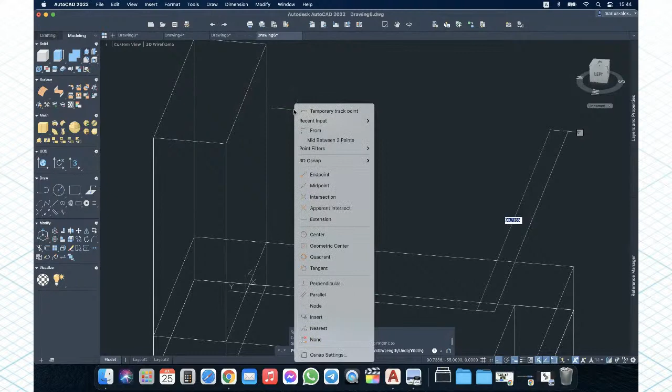Starting from the center, you can write also 0, 0, 55. Now let's go through the top. Shift right click, midpoint for this time. So midpoint it will be. If you cannot reach, deactivate the ortho command. Or you can let it like this, and let's construct another line. 0, 0, origin change. I said to you, sometimes AutoCAD 3D, it is tricky, but not impossible.

So don't get discouraged. Shift right click midpoint and go here. Not midpoint, endpoint. Select these lines. Join. Object converted into one 3D polyline. This was what I wanted.

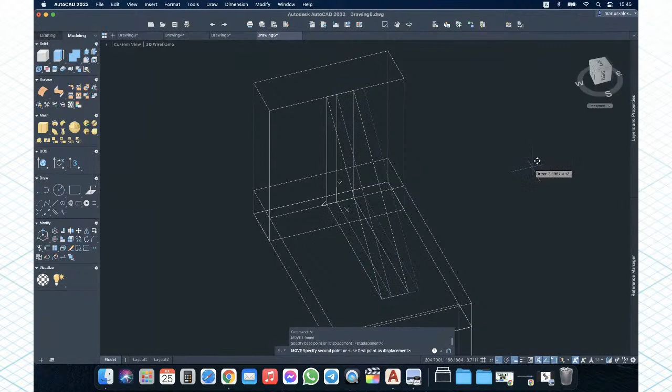And now let's add a thickness here, a thickness of 50 minus 20 minus 20, 10. Press Presspull, 10 units, and it is not on the middle, it is obvious. Select it, and now move command and place it with 5 units to the left side. Now it is on the middle.

Let's select now the union command. Yes, now we have one single solid. Move. Those one, there are all the axes that we have. Oh, here I don't have this one. Let's put it back, let's make the magic happen.

Presspull, select just this part. Okay, now I have this hole. Let's be sure now about it. Good, we selected, everything is fine. It is one piece of solid. Move it.

Delete all of them. And for the final step this time, let's add a color. Our drawing is gray, we will do the same thing. So, material browser, open this command.

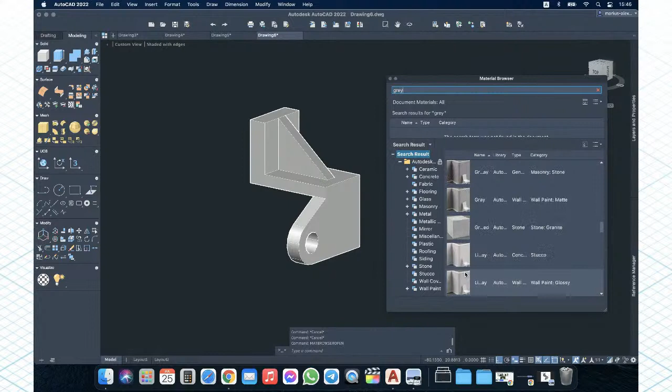And let's write here gray. You can select every color you need, or if it is a painting, or if it is concrete. Okay, this one seems to be good enough. Shaded with edges, and this one will be the realistic one. Okay, and our drawing now is complete. I hope the 3D part is more accurate to you now, and you can handle it in a very professional way. So let's go back now.

That was a fantastic and well-informed presentation, Marius. So we have a question from Aditya Mishra: What is the UCS command? And if I may add, what is the purpose of the UCS command in 3D modeling?

As I said before, or if you noticed, in the 3D world, especially in the AutoCAD field, in order to draw something in 3D you need to have the UCS specify on the XY axis, because if you have, for example, the XZ axis, you cannot do anything. You must have the XY axis. So this is why you need the UCS, and you need to put it there to be 100% sure that everything is good, because otherwise, as I said, it will take another plane, especially if you are using commands for 2D, for example rectangle, circle, line.

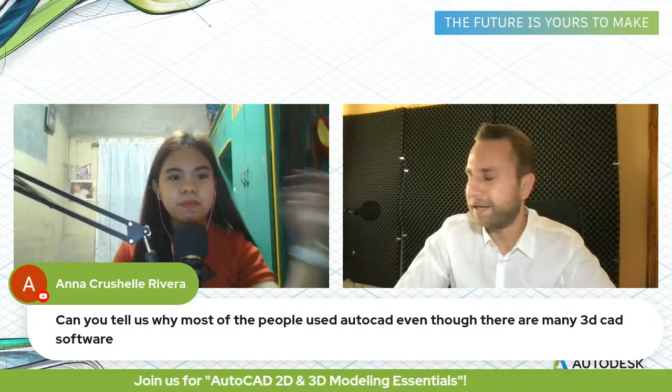Older users know that 50 years ago, for example, there were no computers, especially computers managed to draw things like this, especially 3Ds. It was like a science fiction movie. So it was something unbelievable.

This is why everybody was drawing on the desk with pencil and spent thousands and thousands of hours. Or if they were drawing something very complex in 2D, instead of just applying a copy command, they had to draw it again and again. So it took a lot of time.

This is why AutoCAD was the foundation. Even though there are a lot of programs used today, AutoCAD is still learned in a lot of schools, high schools, and still at the highest universities in the whole world. I know they also teach other programs, but AutoCAD, as I said, is a foundation stone.

From Shadab Muhahid Mula: what is the role of 3D modeling in 2D projects? An example?

So the role of 3D modeling is actually when we are planning to design something. For example, if I need just to see something from the front view or the top view, it is very simple, it is just 2D.

But if I want, let's say, to imagine something or to give a customer a better view, for example I have this external SSD, and my customer doesn't know what it looks like, and I cannot just give him a rectangle. It is just a piece.